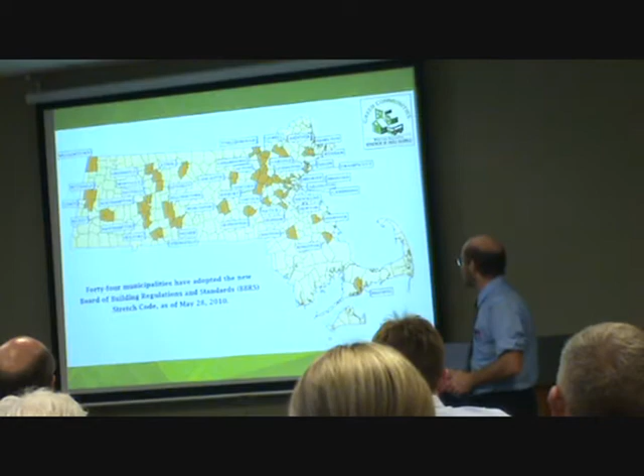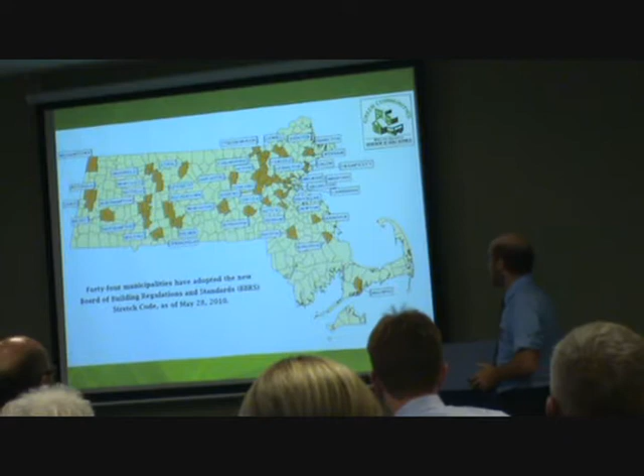This is a map of who had adopted the stretch code as of May 28th. I don't think anyone's done it since then. We saw a rush of them in the spring, especially when town meetings were happening, and we'll probably have a few more in the fall, but then there'll be another rush next winter and spring. Cities can adopt it any time there's a city council meeting, but towns generally only have their town meetings at certain times of the year.

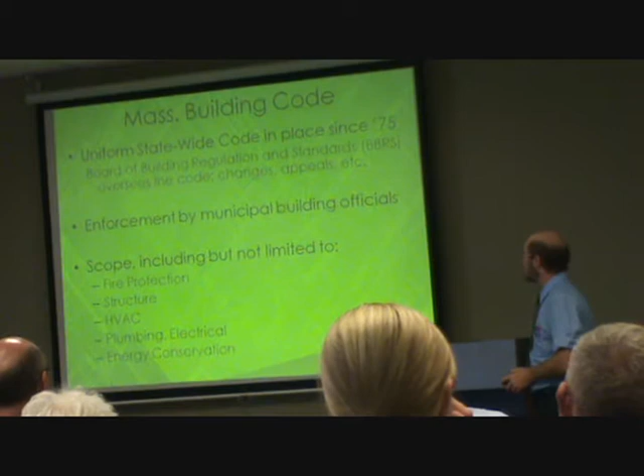For the builders, you know this already: the state has had a uniform statewide building code since 1975. Municipal building officials enforce it, and it covers all aspects of putting up a building. Energy conservation is only one part of that, but the stretch code only applies to the energy conservation part.

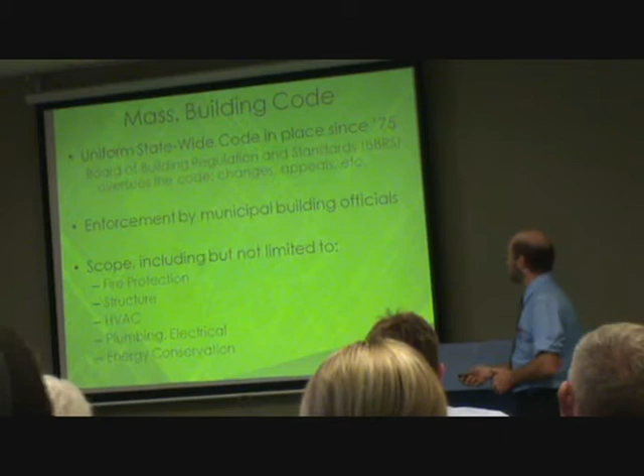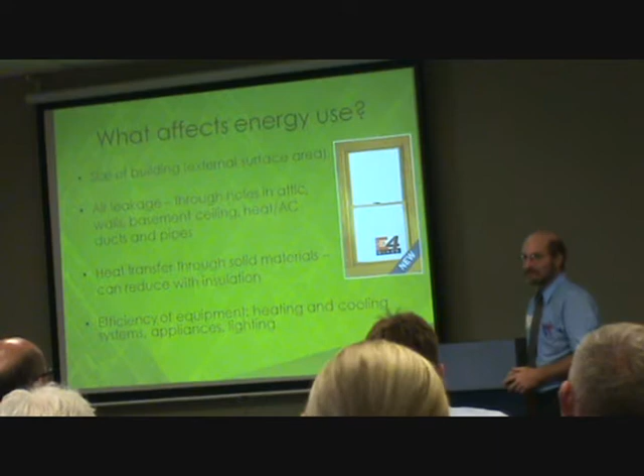Just as a quick introduction, what affects energy use, which is what the stretch code is about. First, the size of the building. Second, air leaking out — if you heat the building and then let it escape, you're wasting a lot of energy. Third is heat transfer through solid materials like the walls and windows. And finally, the efficiency of the equipment in the building. The stretch code is going to affect points two, three, and four, but it's not going to affect the size of the building. We're not trying to regulate that.

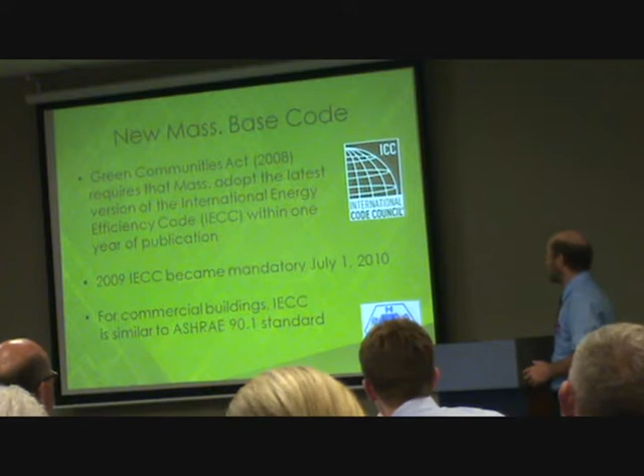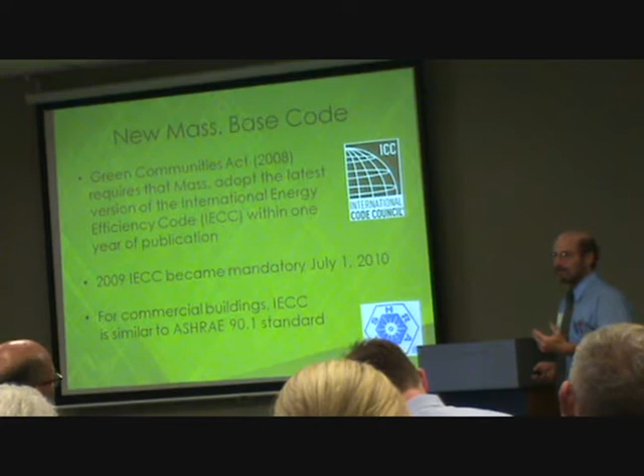Even without the stretch code, Massachusetts is getting a lot more efficient. In 2008, the Green Communities Act required us to adopt the latest International Energy Conservation Code within one year of its publication, and it comes out every three years. The latest one came out in 2009, and it became mandatory statewide just a month ago. So everybody in the state now has to follow the IECC 2009, which by itself is a significant improvement over past versions and will save a lot of energy.

When we wrote the stretch code, we still had the 2006 IECC in effect, and the stretch code was quite a substantial improvement over that 2006 version. It's less of an improvement over the 2009 version, so the difference between the stretch code and the statewide code is actually not as big as one might think at this point.

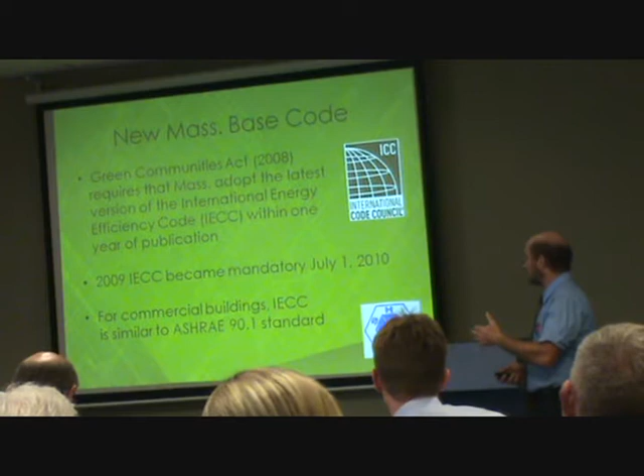For commercial buildings, we also adopted the IECC 2009, which is quite similar to the most recent version of the ASHRAE standard.

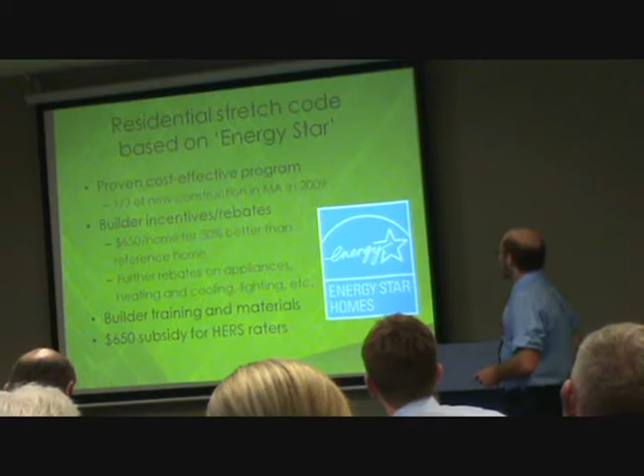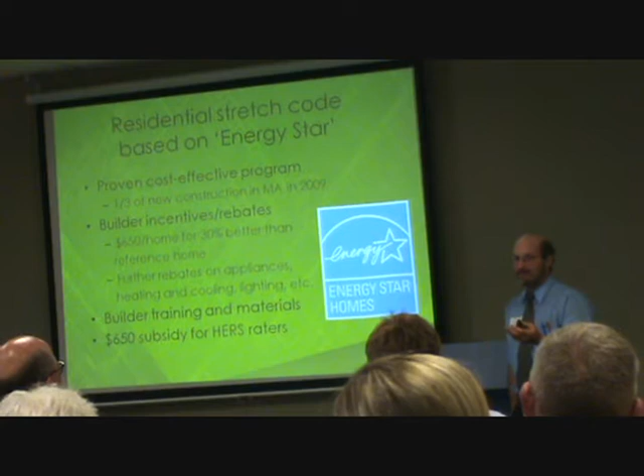One thing that's interesting to know is that even without the stretch code, the electric utilities in Massachusetts have been giving builders incentives to build Energy Star homes. Builders in the room, raise your hand — has anybody taken advantage of that in the past to build an Energy Star home? So two people here — no, one company.

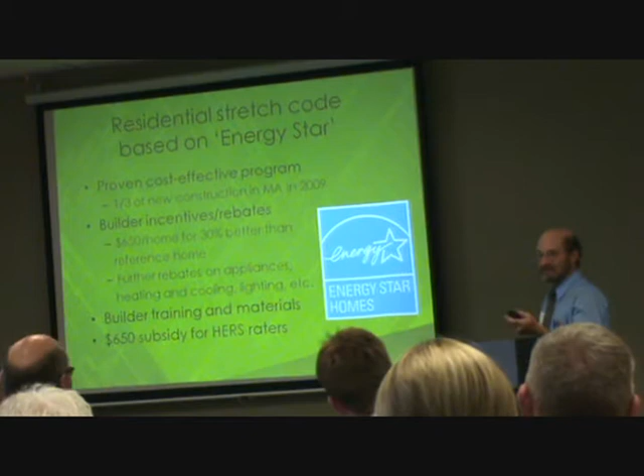Let me interrupt my own presentation to ask the two of you: when you did this, did you have any problems? No, it was actually relatively easy. The advice we got when we hired a HERS rater at the start of the project set us up very clearly, so no one needed to worry about it at all. And you got rebates from the utilities?

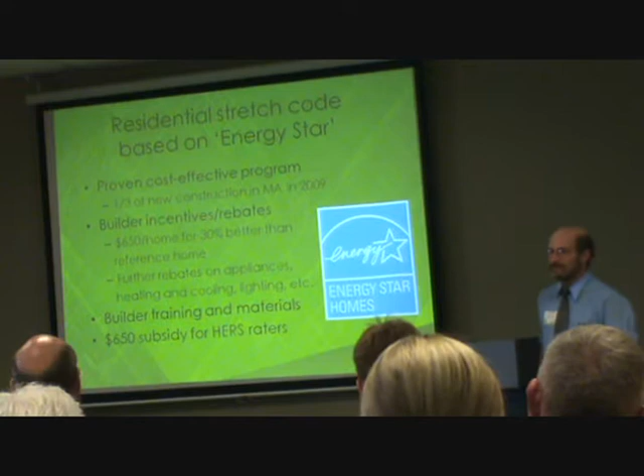So there's some evidence that the Energy Star Homes program is virtually the same thing as the stretch code, and that's one reason why we don't anticipate problems.

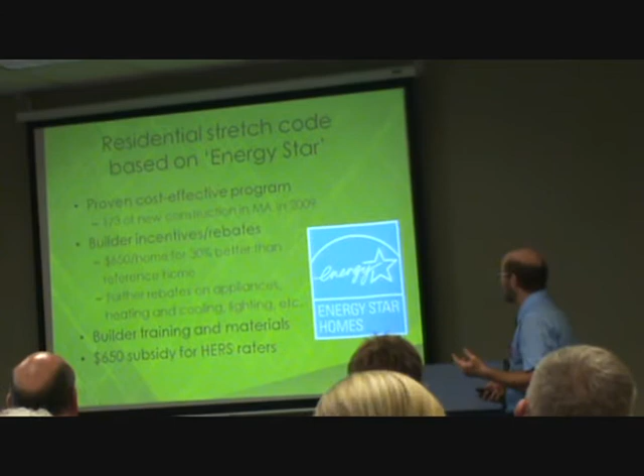Two years ago, Energy Star homes were something like 15% of new construction in the state. Last year, it was up to a third of all new homes. So that's more evidence that this is something that's quite reasonable to do.

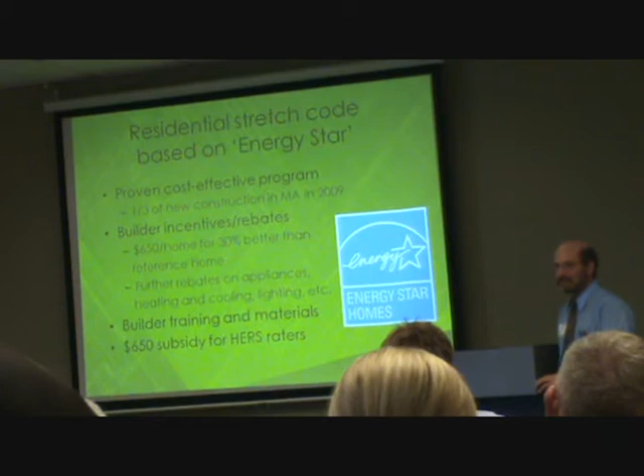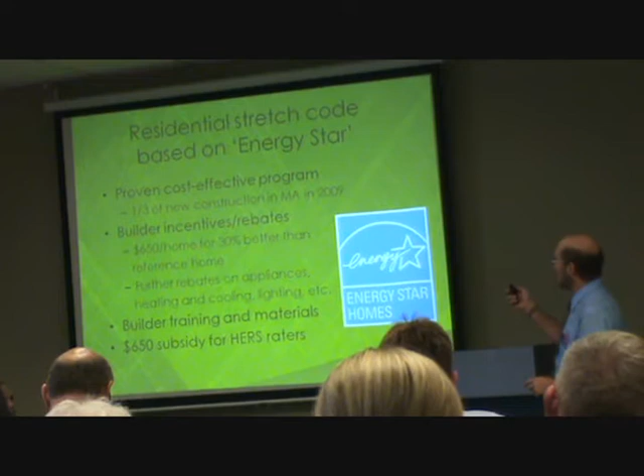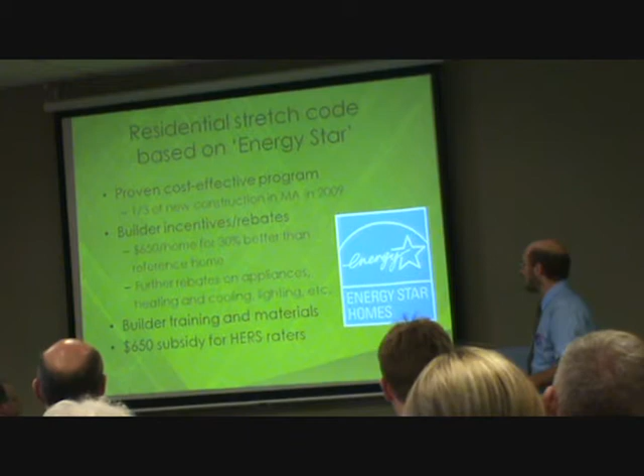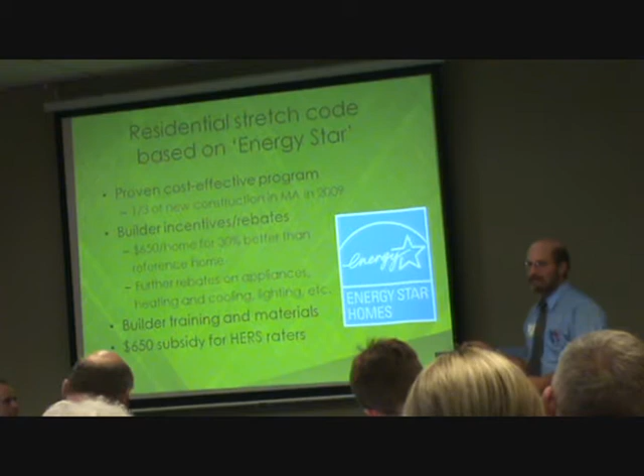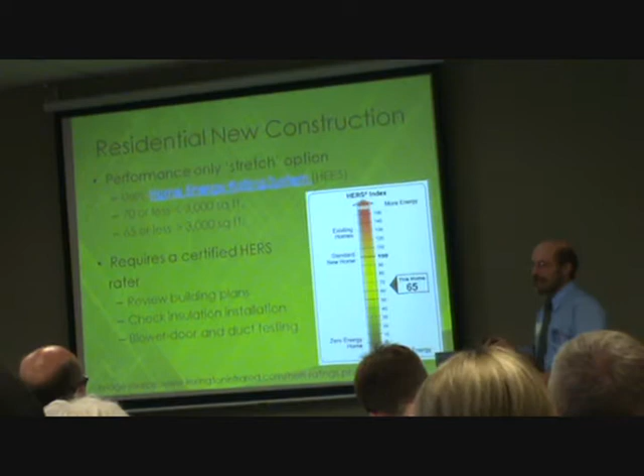Now, for residential new construction, the requirements are quite specific. You have to use the HERS rating system, and you have to hire a HERS rater to do that, and the HERS rater uses the software. You guys are HERS raters? Okay.

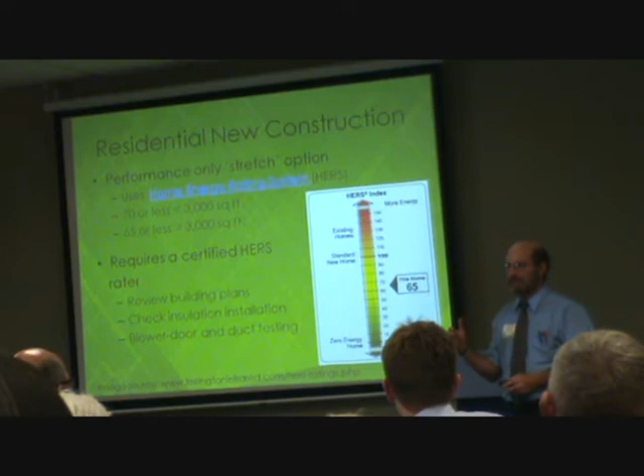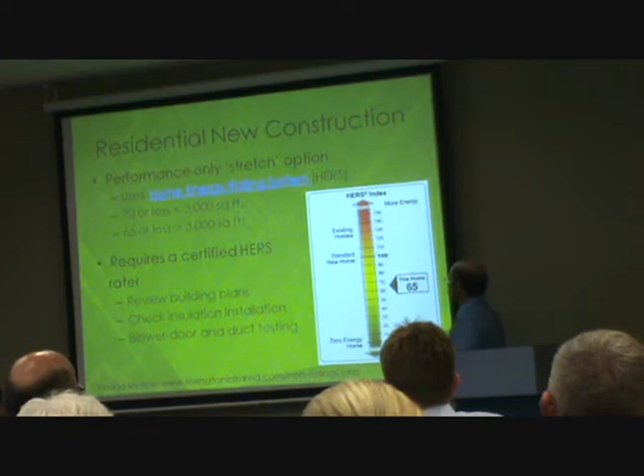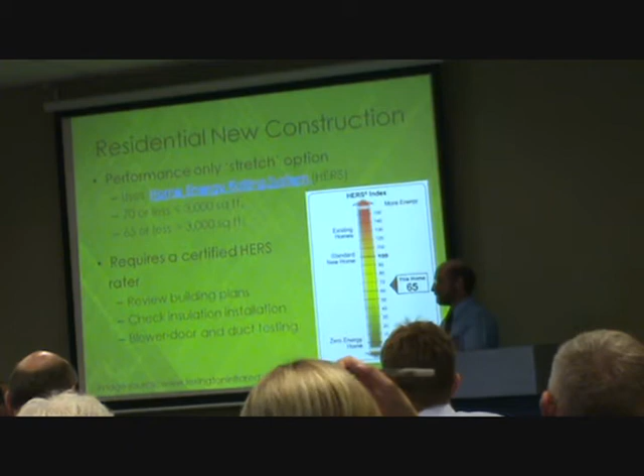The HERS rating system—this is a little tricky doing the comparisons. It was set up so that 100 on the HERS rating was meant to represent the average new home, or a home built to code in Massachusetts. That was, however, the 2006 version of the code. So this 100 here was 2006 code. Massachusetts has now gone to the 2009 code, which is stricter. The HERS software that HERS raters use, however, is still going to be done relative to the 2006 code.

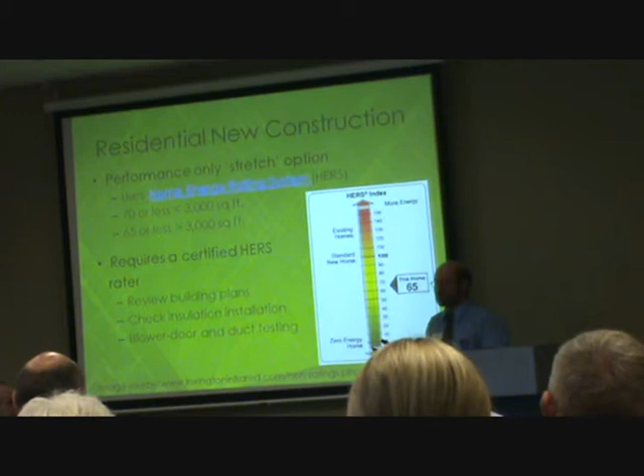The HERS organization nationally is not going to change that. What that means is that if you build a house anywhere in Massachusetts going by the 2009 code, you're going to come out better than 100 to start off with. We think it's going to be different for every house, but you're probably going to come out somewhere around an 85 on the HERS index. It'll no longer be 100.

It's probably a little easier. You'll get a slightly better rating if you're building a bigger house. And a smaller one, it'll depend on what kind of heating system it has and so on.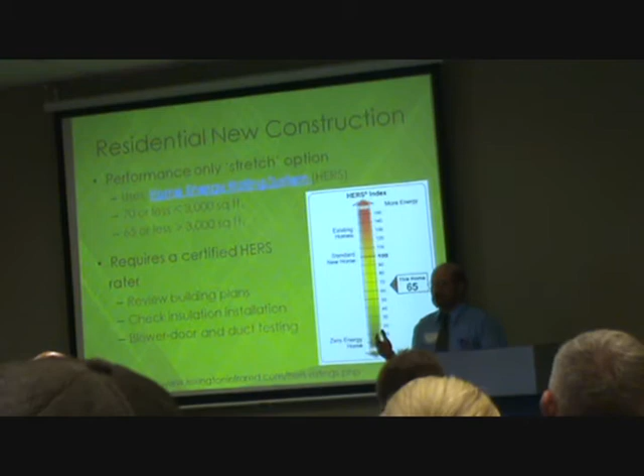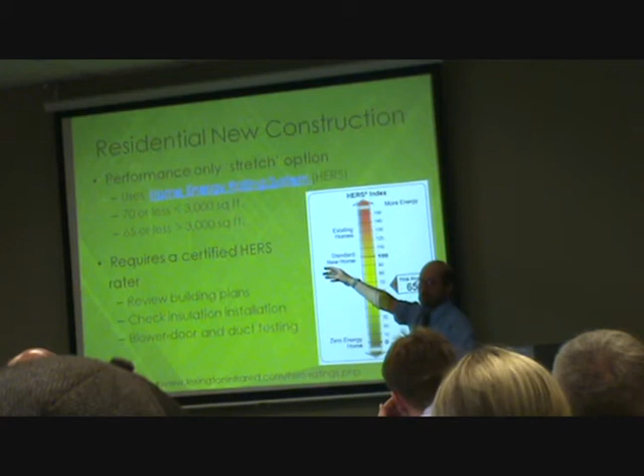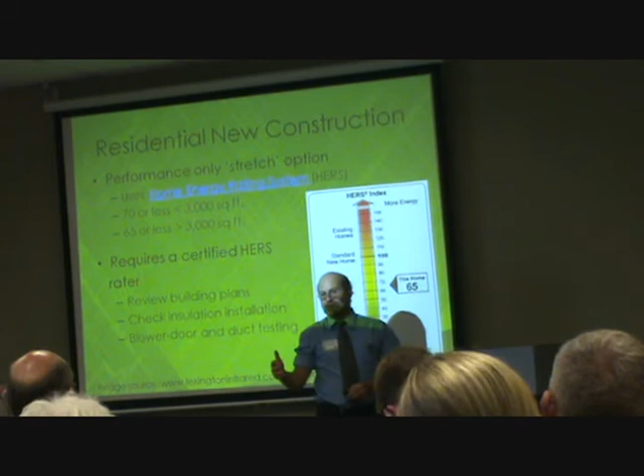So the stretch code requires for a house under 3,000 square feet that you get a 70 HERS rating. If it's more than 3,000 square feet, you have to get a 65. We used to say that that meant this was 30% better than base code. It's no longer the case. Because of the new base code, which will get you already to about 85, we would now say the stretch code is, say, 15 to 20% better than the base code—the difference between 85 and 70 or 65.

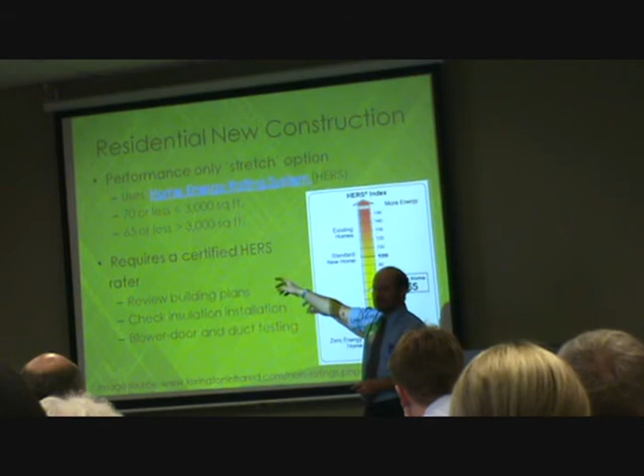I know that's a lot of numbers, a little confusing. Is that clear, what I'm saying here?

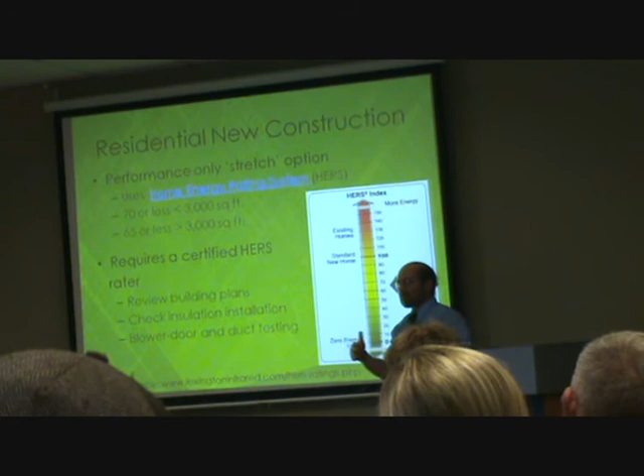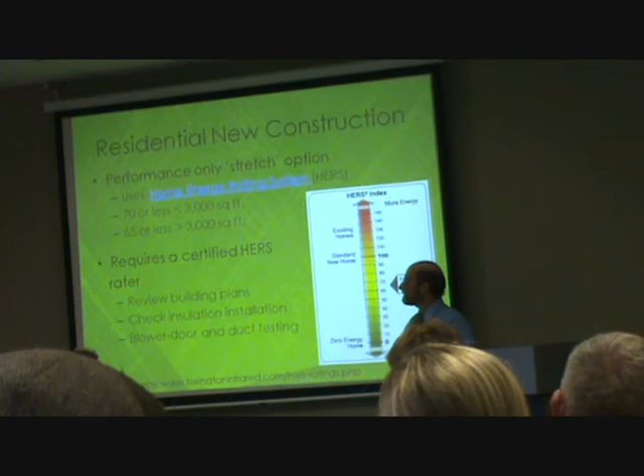Basically, what you're saying is the lower number you get, the better your house rating is. Right. And what I'm also saying is that because statewide we've gone to a stricter code, the stretch code is no longer that much of a difference from what you would have to do in any community in the state. You have to get a certified HERS rater.

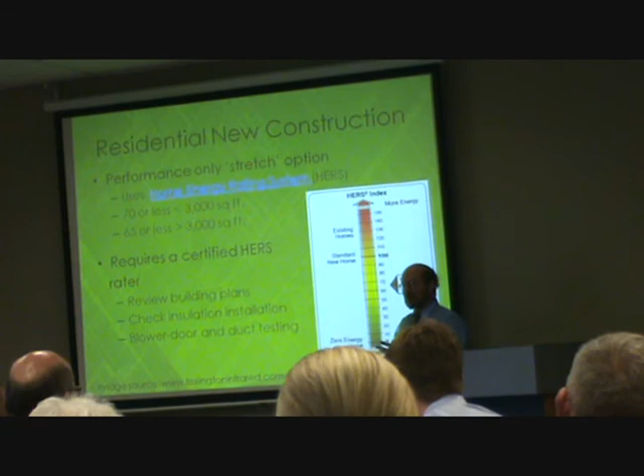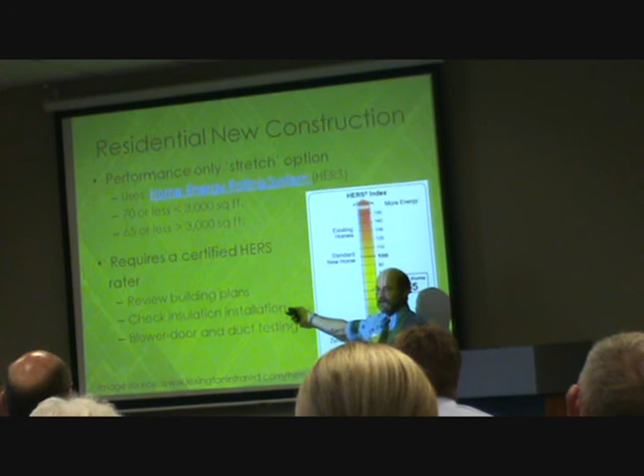The HERS rater will review your building plans before you start, and using the software will tell you if you build a house this way, this is the rating you ought to get. But then they also have to check how you do the work. They have to check how you install the insulation, and the quality of that will make a significant difference. And they have to test how well the building is sealed for air leakages, which you do with a blower door and duct test.